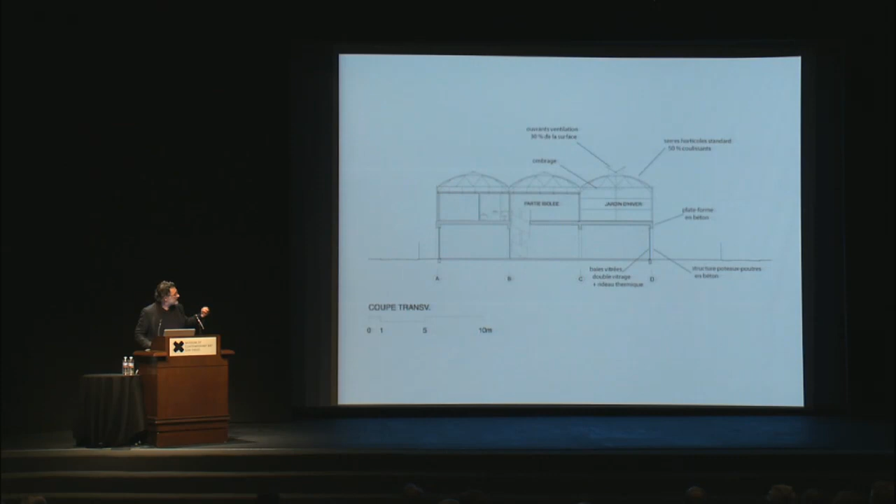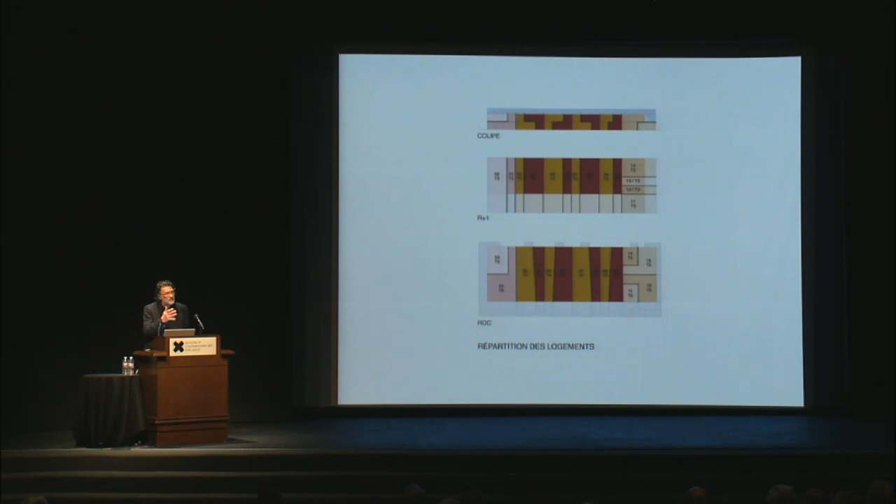To adapt these two systems creates a system in which it is then possible to create flats. Partition inside with flats on the ground floor and on the upper floor each time, so that each family and each flat could have the qualities of the different spaces.

So instead of a flat that would be type 3 or type 4, with 3 beds for example, and normally that is 70 or 80 square meters, there it was possible to build in the same cost, in the same budget, a flat that is 180 square meters.

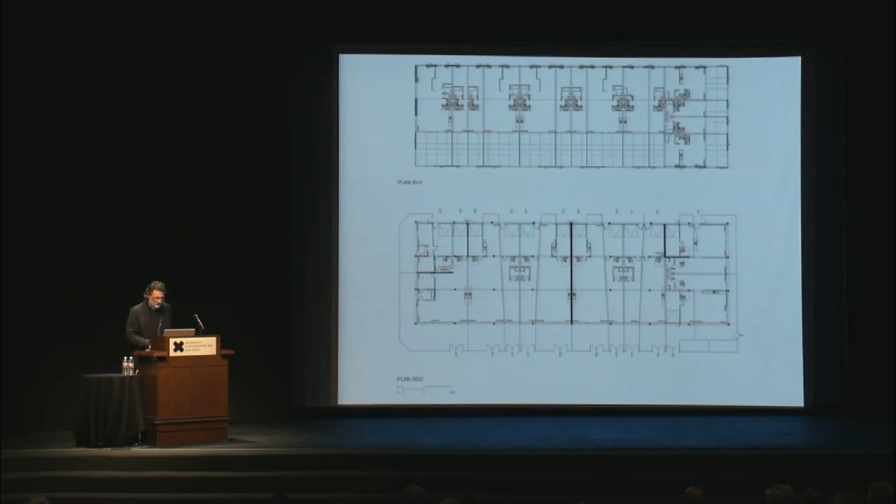Using always these systems of envelopes, greenhouse envelopes, in order to have natural ventilation, to use the sun in a passive way, and to create a climate that will also reduce the energy consumption. So it is this play, this game that we can have with the climate that really interests us in all these projects, using all this passive system in order to create good conditions of living.

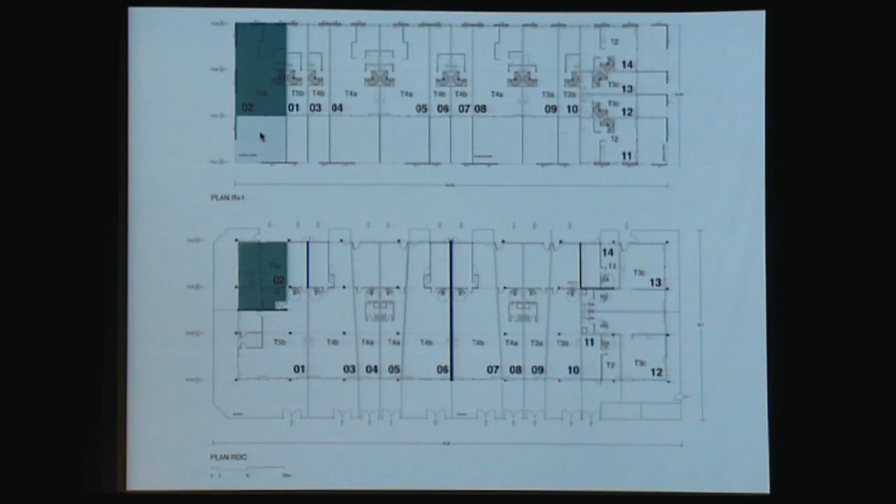Inside one flat, the winter garden. And another flat that is a type 4 with 4 rooms has a part here on the ground floor and another part here with 2 other rooms, a big living room opening to the winter garden. The winter garden is 40 square meters.

The bedroom on the ground floor, the living room, opening to the winter garden. Screens for the sun when there is too much sun, and possibilities of ventilation. So it is this free space that changes totally the ways of living, that gives more freedom for the people living in, and that really interests us when it stays in the same budget as a normal flat.

We can apply this for flats and for houses or for villas, but it's also possible to think about it for public buildings, like this one that is the School of Architecture in the city of Nantes, close to the river Loire, where the same problem happens.

How is it possible to do with a budget, with a program extremely adapted to this budget, to imagine that a school of architecture can be something else than just a school of architecture? I mean a school of architecture that could be a place of debate, a place of discussion, a place of invitation, a place where, as if you had a very large living room, you could invite another school to come and discuss with you.

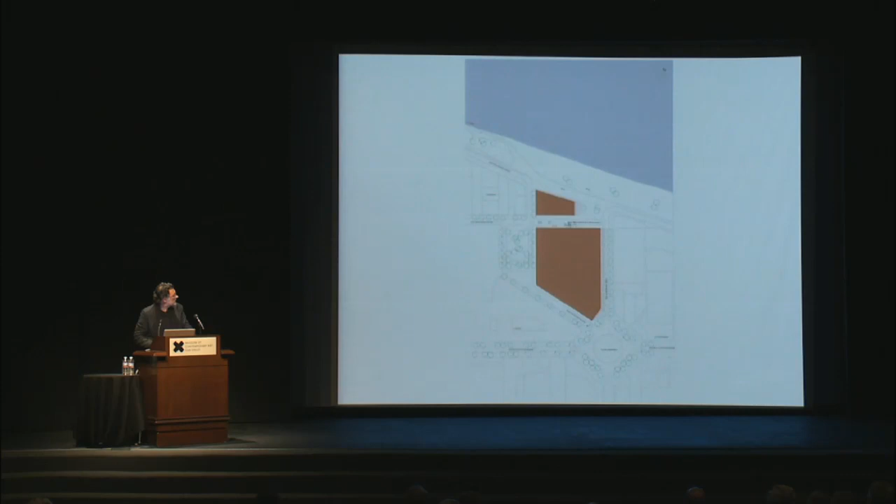We use these two parts of the parcel with a street that crosses the space, and we imagine a system. It's no more an architecture that is an object, but an architecture that is a system working with the climate outside, with the city outside.

So we have 3 main floors, at 9 meters high from the ground floor, 7 meters higher, and another one 7 meters higher. Each of these floors has a capacity of 1 ton per square meter. And from the ground floor, a ramp of 8 meters wide goes from level 0 to level 1, to level 2, and level 2 to the roof.

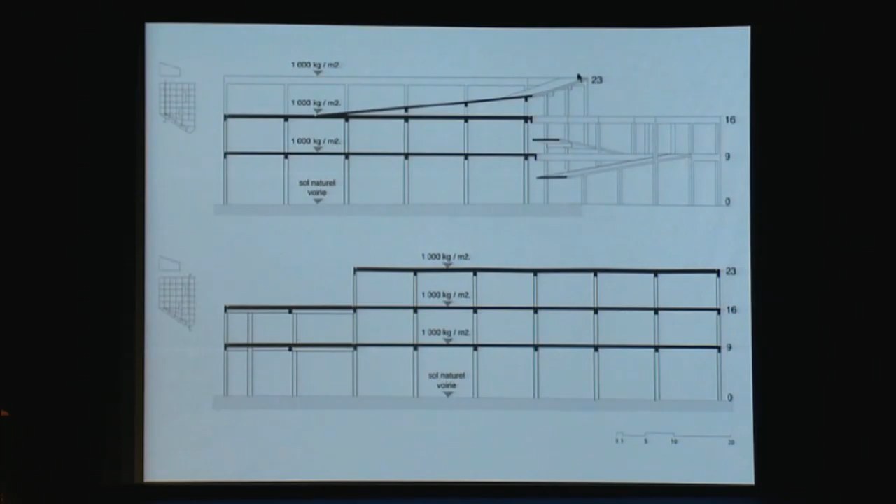And the roof is also a 3,000 square meter area with 1 ton per square meter of capacity, in order to propose some possibilities and some freedom for the school. So it's a very efficient system of construction with prefabricated elements: only a frame, columns, beams, and floors.

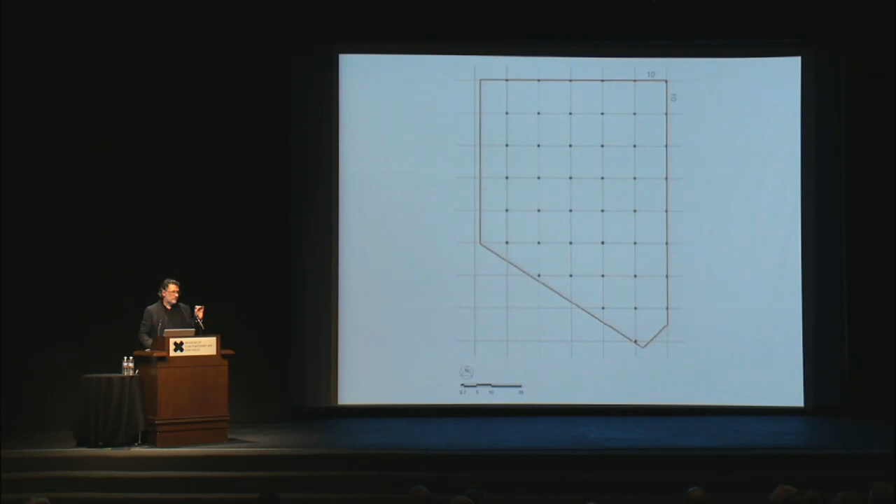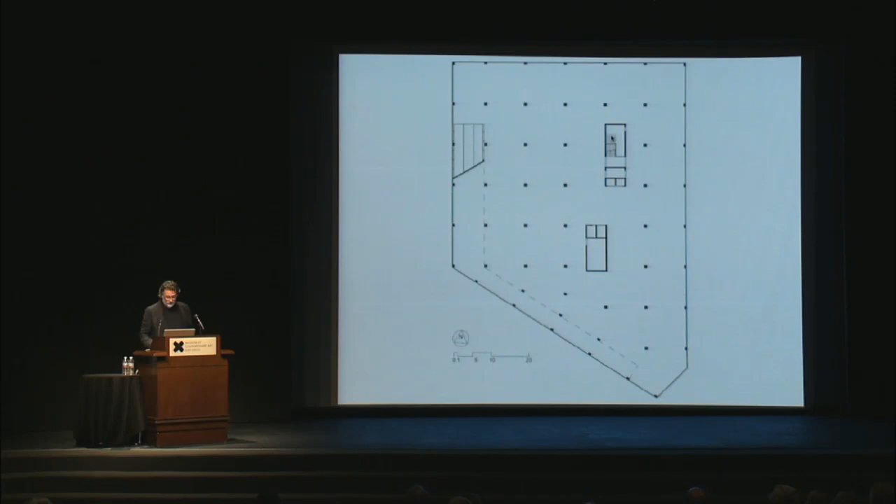The starting point of the ramp, and the elevators and stairs, and then the construction of the school, like a very large system open to a maximum of possibilities. You see here the ramp going from here, and then here, climbing here, and then reaching the roof here. So this was the building.

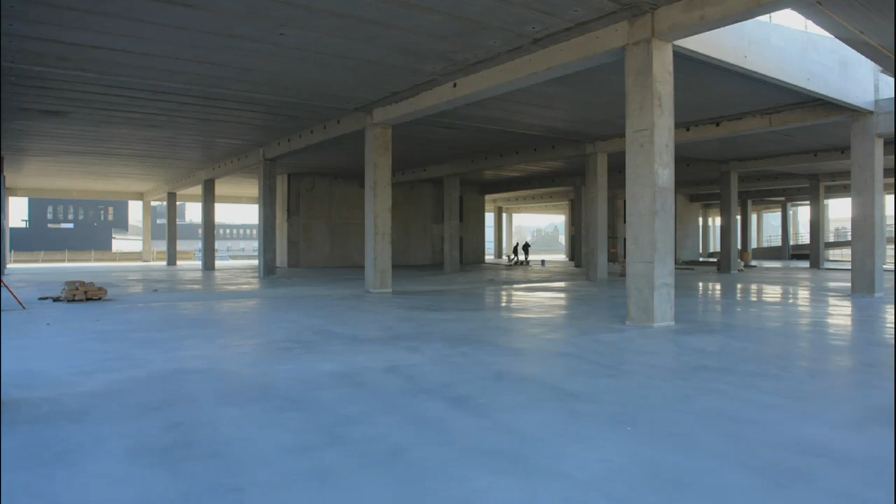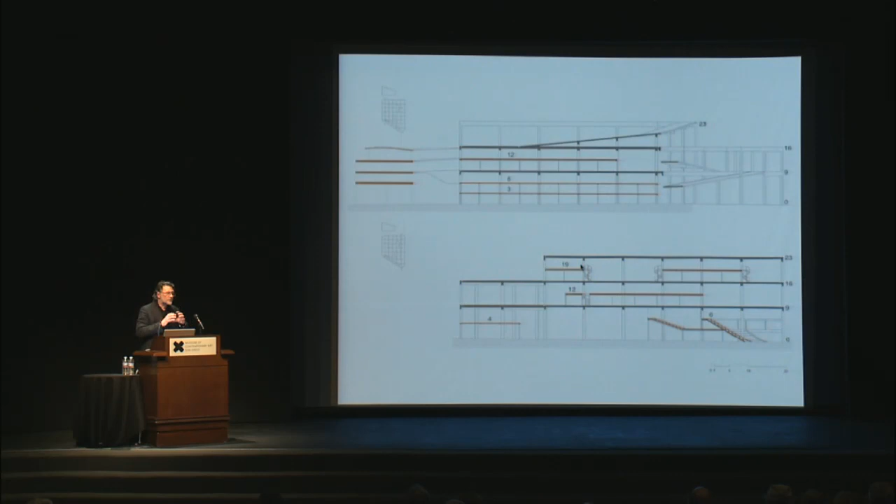Like a loft that we leave to the school, a very large space open to construction inside. And then, inside this system, it was possible for the school to go in, to install itself with new floors, lighter floors made by a steel system, these red ones, because we can use the height of 7 meters on each floor. And all these floors can support directly on the main principal floors.

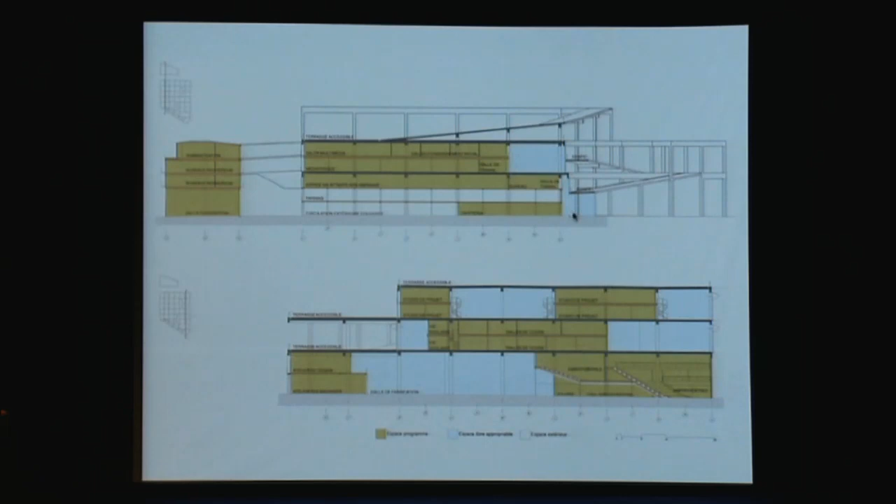Inside the system, it was possible to define 2 kinds of climate. The green color shows the programmatic climate, the one that is heated to 20 degrees, where it is totally insulated, etc. And the blue one that you can see here is a sort of intermediate, bioclimatic climate. So it takes the sun by passive radiation, and also creates a sort of intermediate climate between the outside climate of the city of Nantes and the inside one.

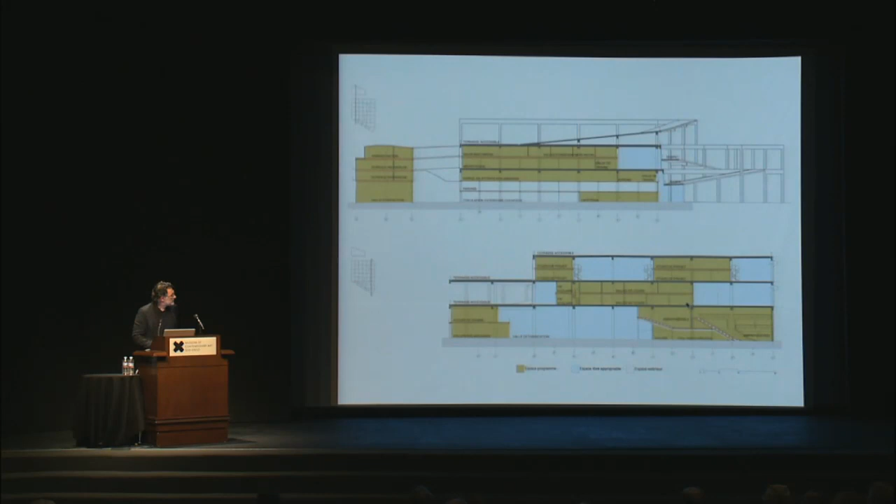And all of this creates a system where you have this combination of possibilities, to use the climate differently. And this offers, at the end, a capacity of 20,000 square meters of use instead of the program of 10,000. And you have nearly 30,000 square meters, including outside space.

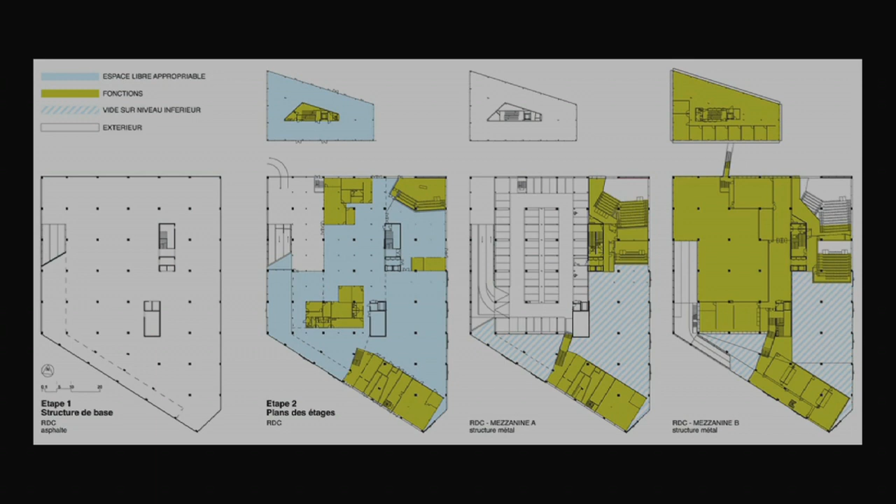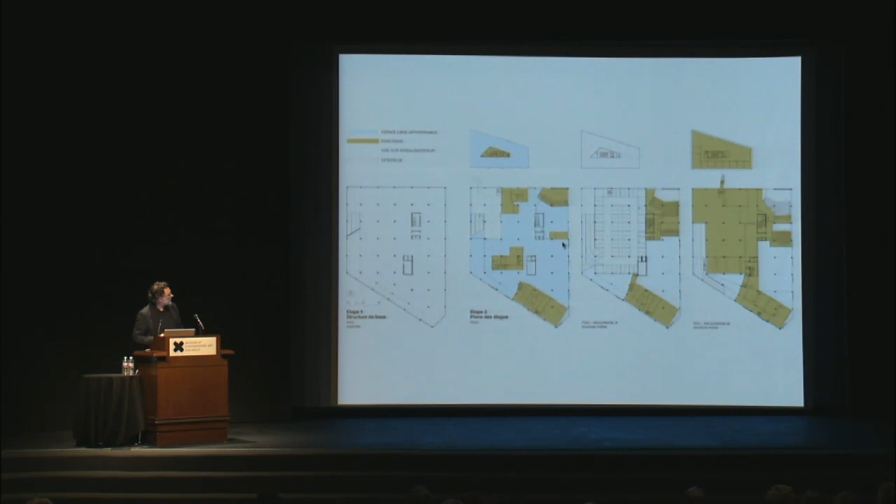So really playing with the budget, with respect for the original budget, giving the capacity of double space and double area. So the ground floor with the 2 intermediate floors, with the car park here, that is not on the ground floor and not underground, in order to be economic, and different spaces for atelier and auditorium, administration, research.

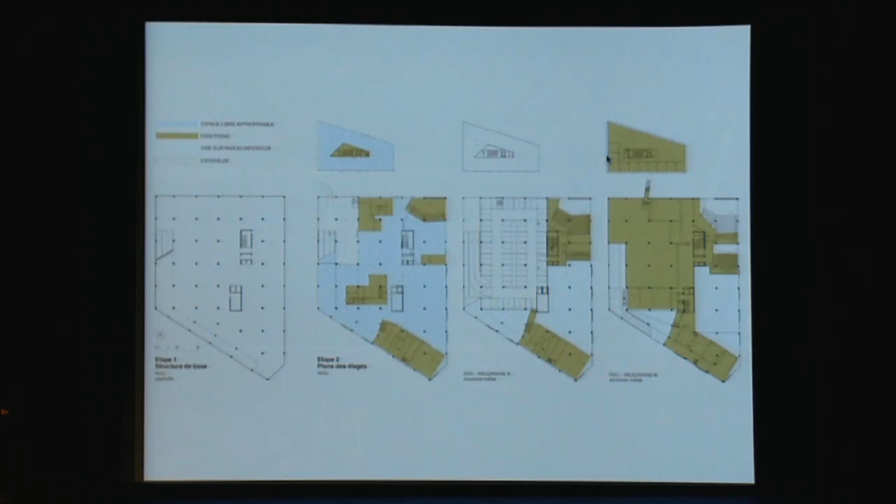The level 1, at 9 meters high, where you always have the structural system and the mezzanine, the intermediate level.

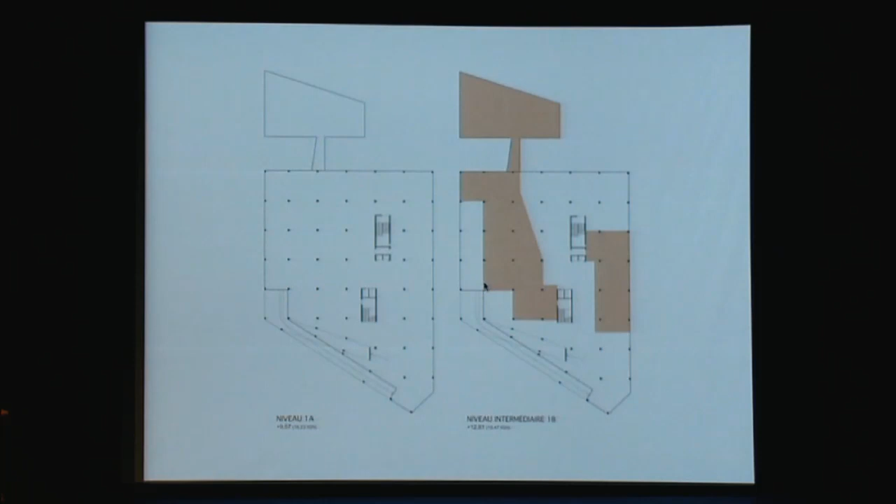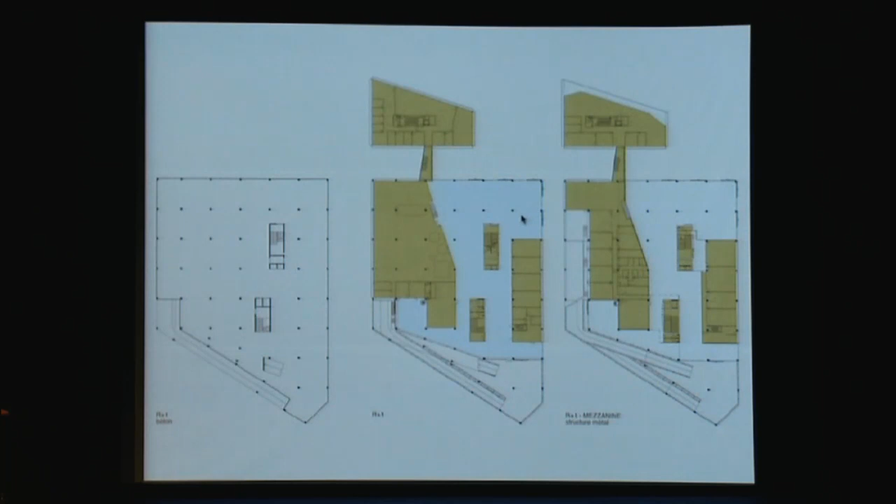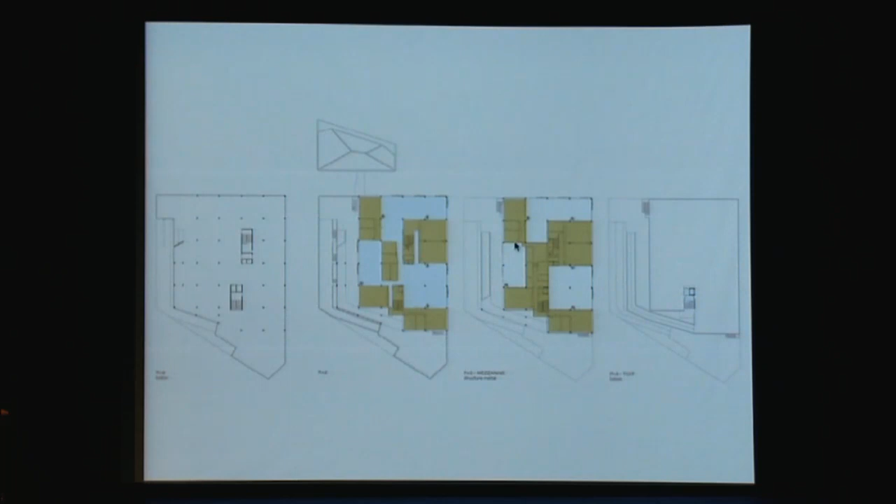And the way we have two different climates, a programmatic climate and a bioclimatic one. Level 2, where we find the studios of architecture with the same system of different climates, and the roof, which is this big space area for different possibilities of use.

Then we see the building of the intermediate floors, and then the project closes with different facades, sliding, open to the outside. The cafeteria, the auditorium that can open its screens to the landscape behind, which is the river of Nantes.

So this question of a very strong relation all the time between inside and outside. When I define architecture as a system, it is something playing with the outside. It's not an object finished by an envelope, but a system always open by sliding doors from outside to inside.

And a system that makes all events possible, using the building to look at what happens in the streets, the different events, the starting of the ramp and the parking and the classrooms there. This free space where you can have discussions.

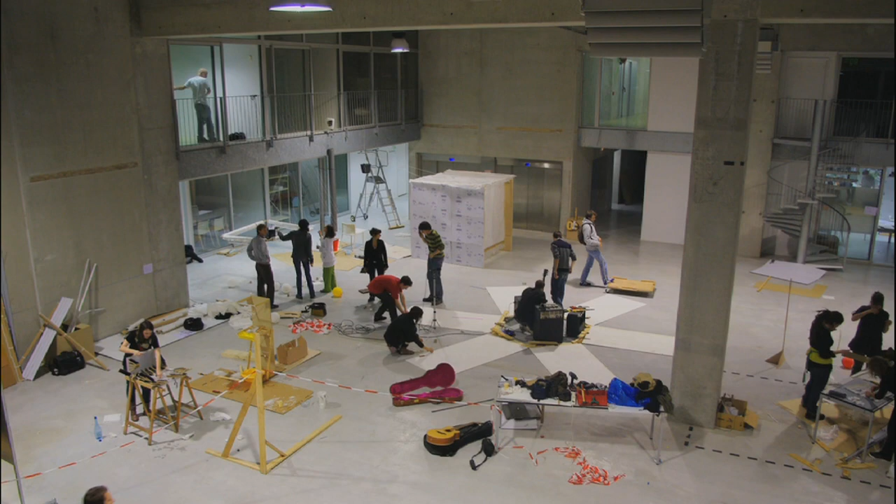Using the space for models, possibility to bring some elements with lorries as storage, to bring them on the ramp, to follow the ramp to the last floor, to use it also as a free space, open to the city, open to the public, open to the cyclists.

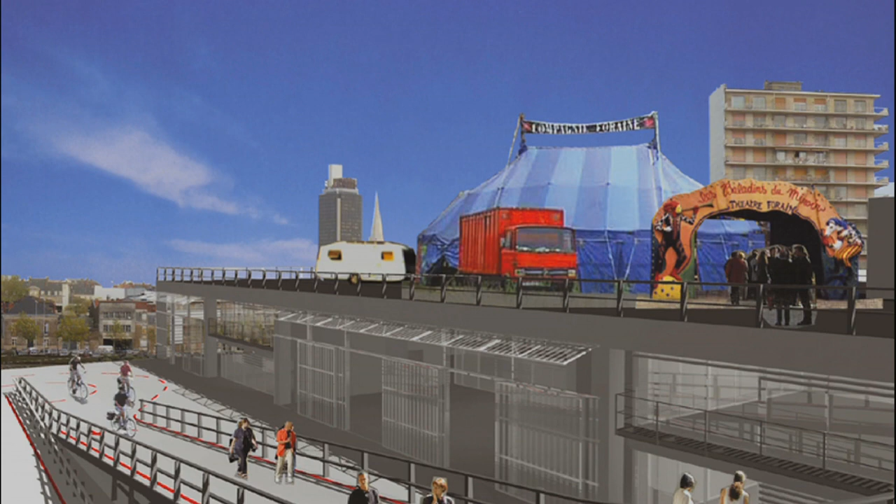And then this image, which is still not done, but the possibility to have on the top roof also a circus and a panorama over the whole city.

So here also this economy, this question of what is the minimum of material I have to use in order to create the maximum of volume, the maximum of capacity, the maximum of use possible for the inhabitants of this school, is the main question.

Another very small project talking about urban space. It's a place in the city of Bordeaux, outside the center, a very modest situation, where the municipality wanted to embellish the plaza. And after a lot of research, discussion, interviews with the inhabitants, we finished by...

convincing the clients, the Mairie of Bordeaux, that the best project was to do nothing. No reason to change the ground, no reason to change the benches, no reason to change the lights, because there was a sort of charm here, everything was enough, and there was absolutely no necessity to change the things that were quite okay like they were.

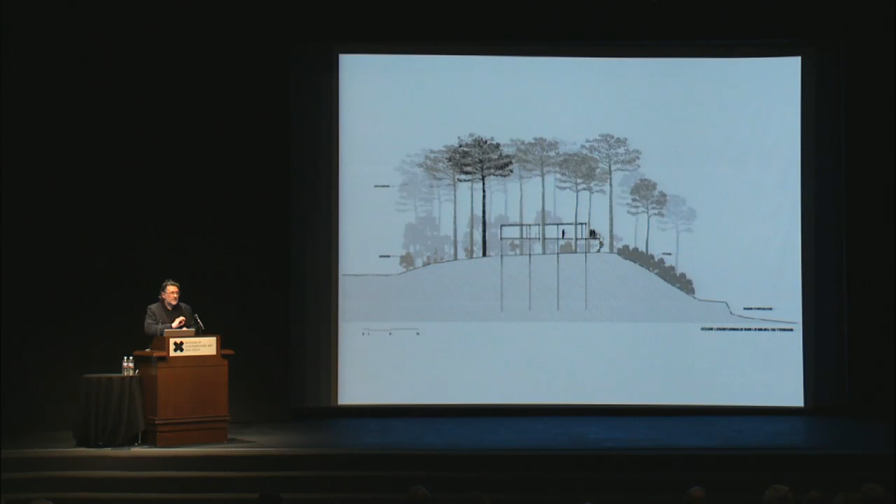With micro foundations in order to be extremely precise and to avoid damage, and also to take care with the roots of the trees. The challenge was to keep all the trees, absolutely all the trees. So you find the trees inside the house or just outside.

Here in the corridor between bedroom and toilets, for example. And to use all that exists.

Also the idea that we could go under this house and it could be dark, but in fact the reflection of the sun on the sea makes the sun come from down to up, rising on the aluminum elements so that the place is lightened.

And play—it's always a question of game and play. It's really interesting and nice and exciting to work like this. Find the way how technically to leave the trunks moving with the wind inside the house.

And then to have the feeling that as you live there, you are part of the forest. Your house is just a platform of concrete with some steel columns, and this is the minimum to take the maximum advantage of the situation. So always minimum for maximum.

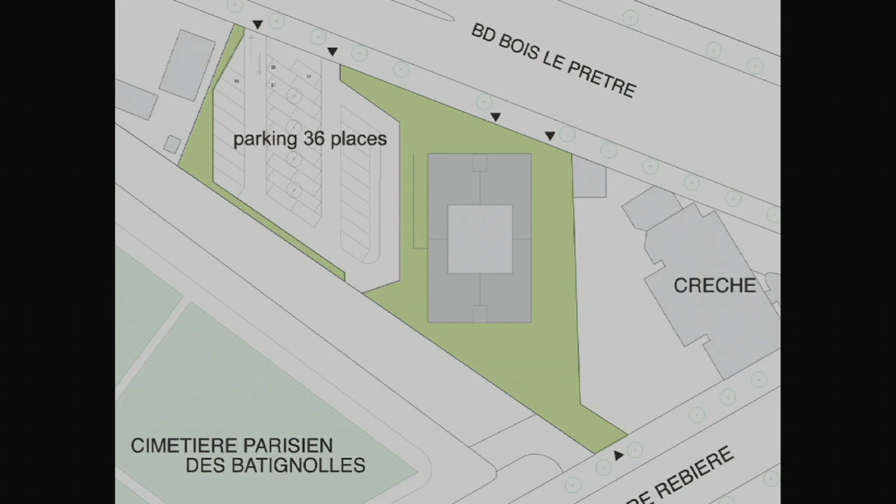And you have also beautiful views, but behind very, very small windows. So there is time for discussion, to explain, to make the project. Here it was with a very good friend, Frédéric Druot. We were associated on this project, to see the possibility to extend the building.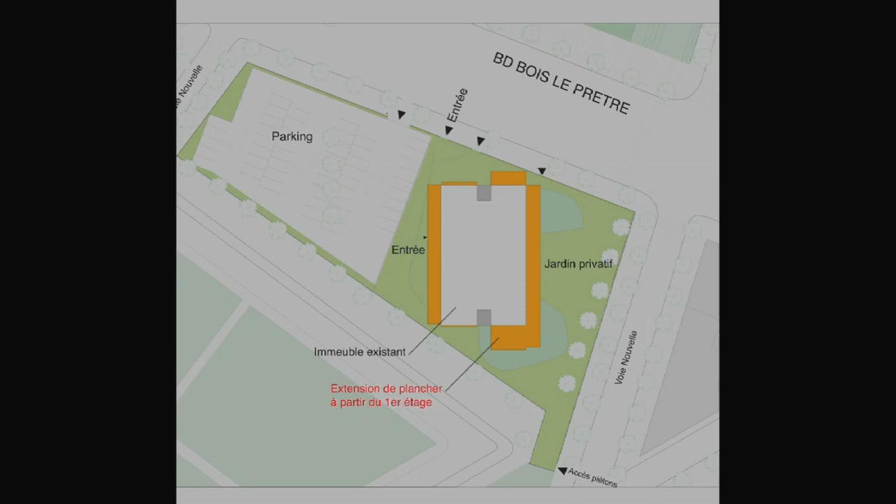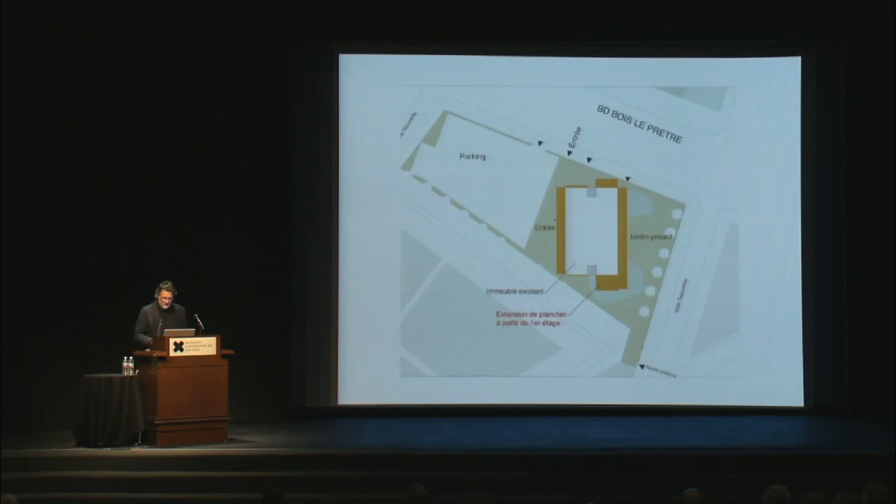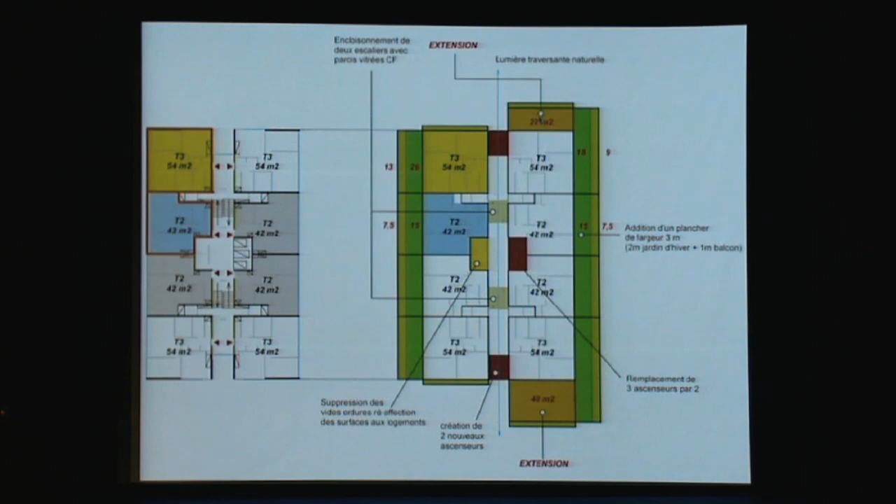So the orange part is the extension of the building, in order to modify and resolve some thermal problems, some energy savings questions. For example, here it is the situation today with the type 3 and type 2, and here is the project with the extensions—winter gardens and balconies. And we see here how one type 3 takes one bedroom more, plus a winter garden and balcony.

All the families are living in this building, and it was clear that they should stay during the works. So we have two more elevators in order to create better accessibility to different people.

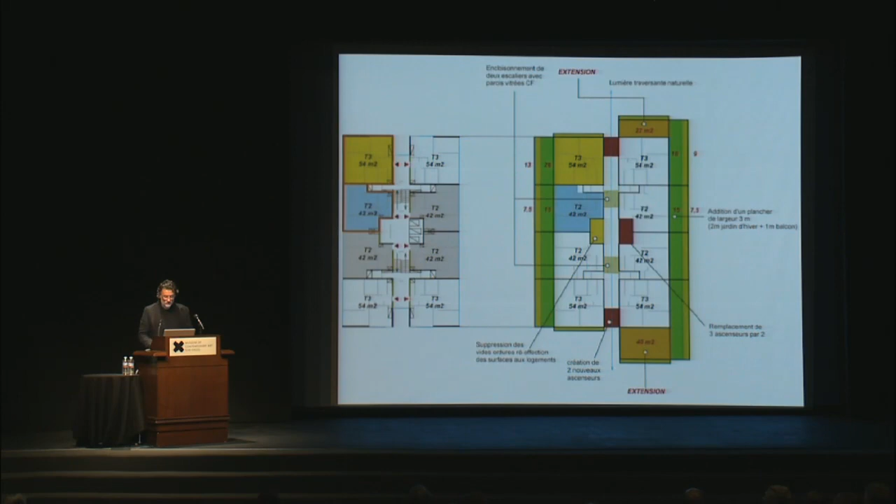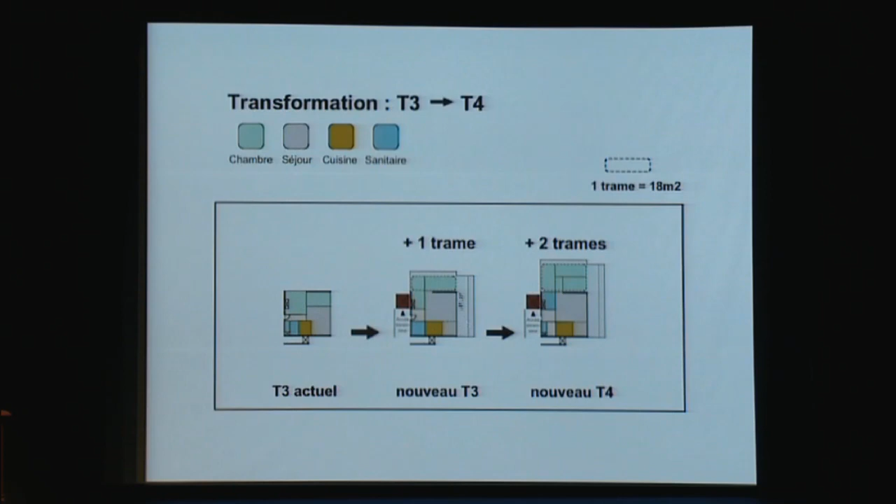We see here how one flat is transformed: a new elevator, a new heated space for a bedroom and a new kitchen, and a larger living room, and then the winter garden and the balcony that could transform into a type 3 or a type 4.

This is all the movements of the people. People wanting to live upstairs, or people that were upstairs preferred to live downstairs. There were 2 people in a type 6 who wanted a type 3. There were 6 people in a type 2 who wanted a larger one. A family of 19 people in a type 6, so we had to find 3 apartments.

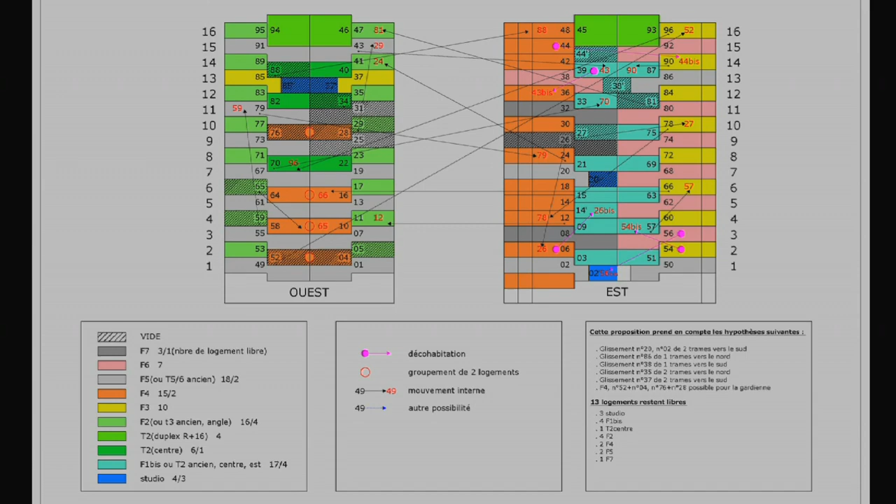All these movements of people were discussed and proposed, and with this precision, everybody agreed to do the project.

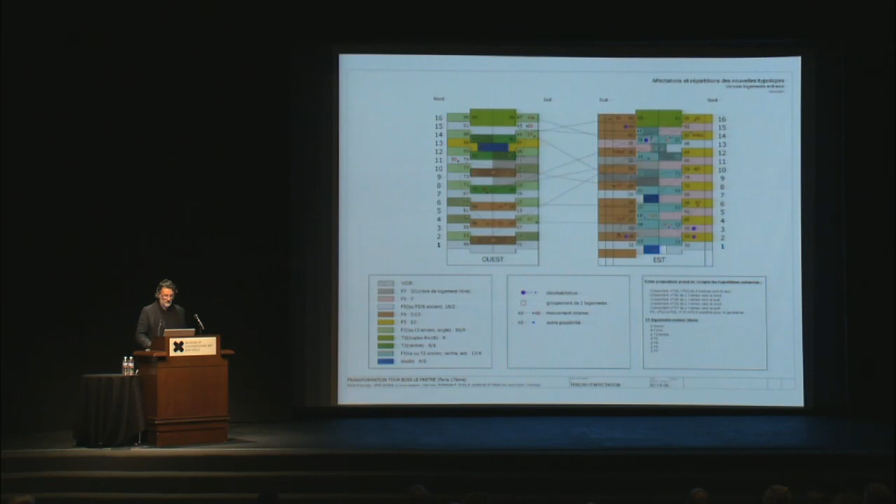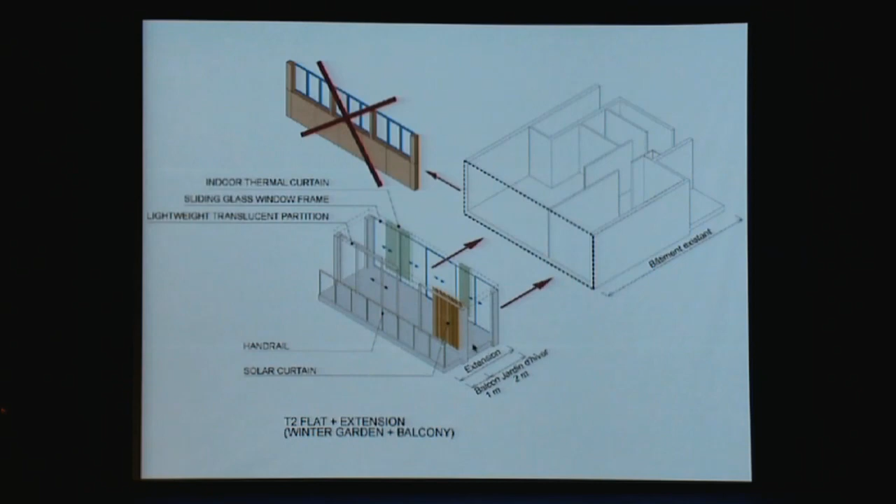The question was to change this facade and add a new one, with large sliding doors from floor to ceiling, open to a balcony with a winter garden, like this.

The new construction has its own foundations. It just comes close to the old facade. And then the building is transformed with the extensions.

This gives a better situation for the rays of the sun. In summer, there is protection by the main facade, so you are in the shadow. In winter, the rays of the sun can go quite far, so you use the passive solar effect.

At night you have a very thick curtain with insulation that allows you to keep the warmth in. With these elements, it was possible to achieve an energy saving of 60%.

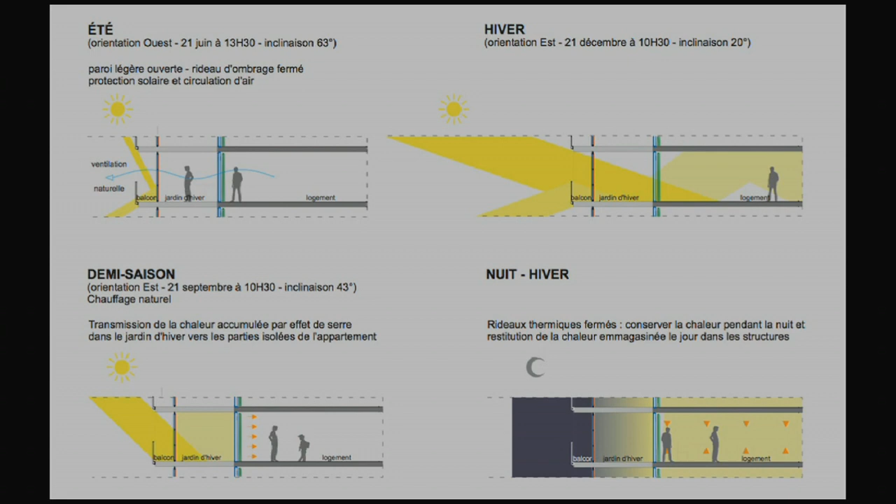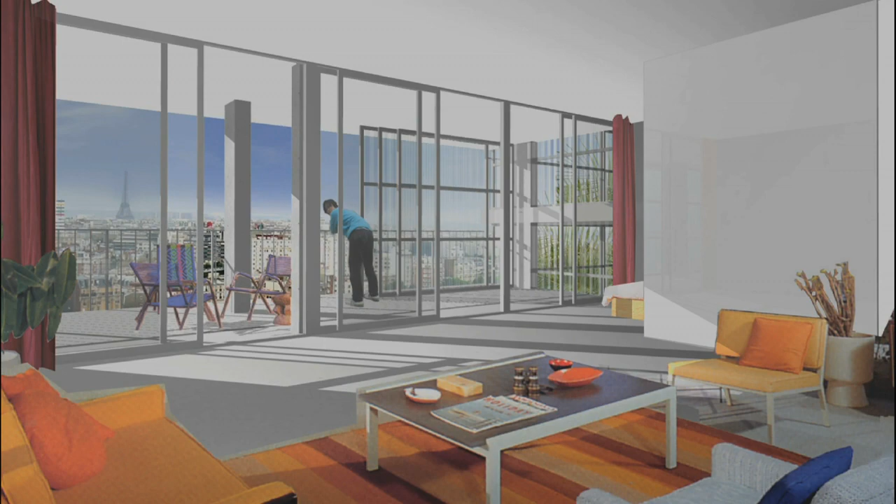So like it is, and like it was transformed in the image, with this winter garden. This here is the place of the old facade, changed by the new one: 2 meters of winter garden plus 1 meter of balcony.

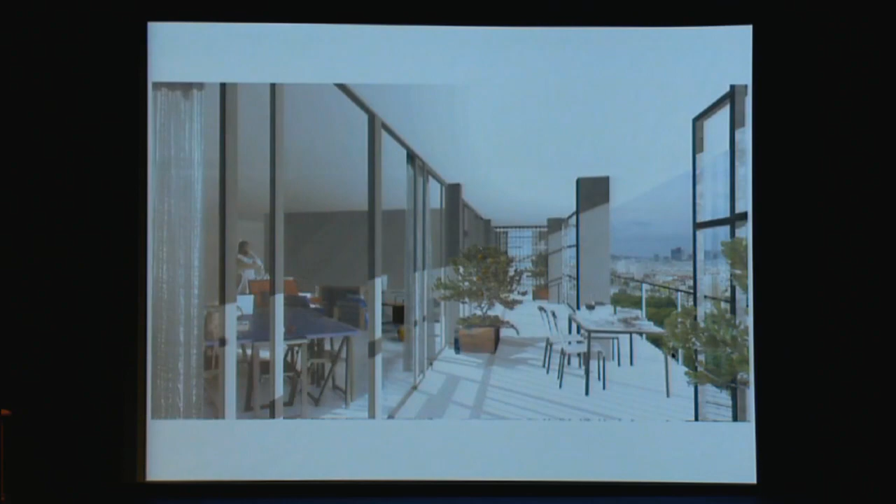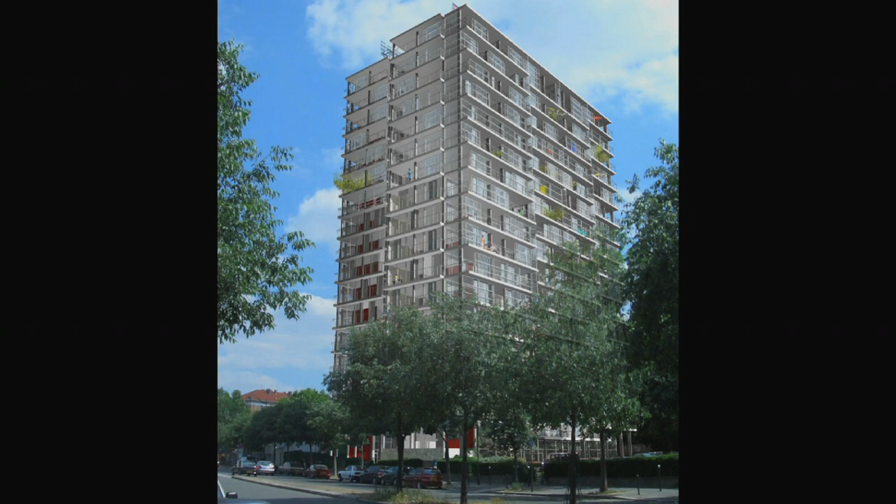This change from inside will automatically change the building's look from outside. It's never really a question of facade, it's a question of life inside, and when you look at it from outside, it's perfect.

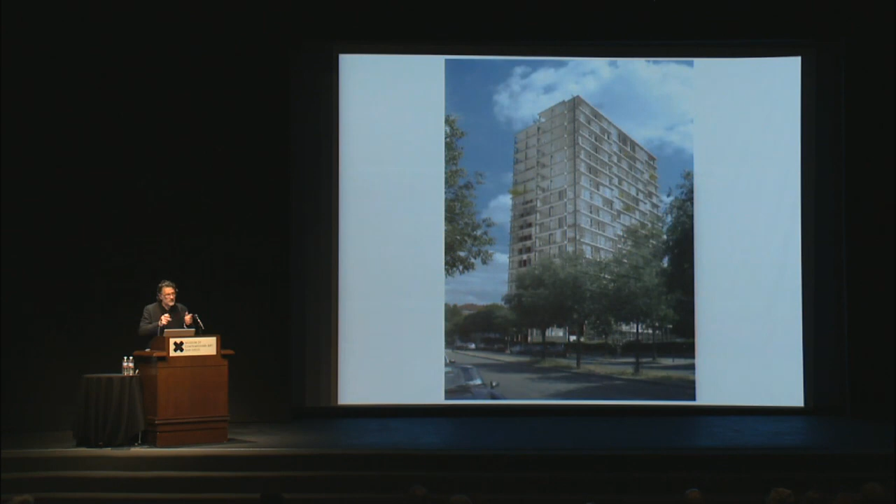It is not a question of developing an object. It is just a question of giving good living conditions for everybody.

This was the first prototype, and this was the situation before it changed. Then the works start: foundations, changing the facade, taking away the asbestos. All the time the people and the families were inside.

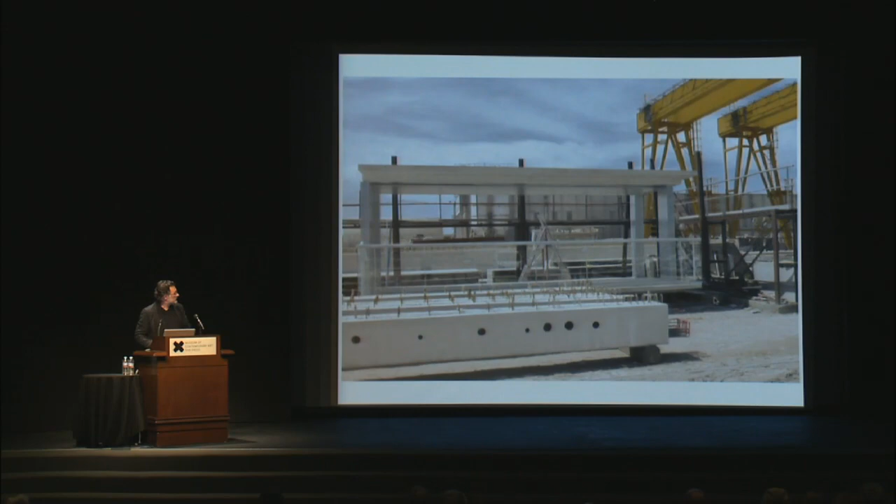Making the new elements like modular systems, each of them 25 square meters, and then placing them along the facade.

Now the work is nearly finished. It will be finished in 3 or 4 months. The people and families are really happy with their new extensions.

At the end, it's a project that is much more economical than demolishing and rebuilding. So the economy is better. Also interesting, instead of having a new standard after demolition, we have here a building in which the areas and surfaces of the apartments are much bigger than the standard. So here too, the economy leads to this kind of solution.

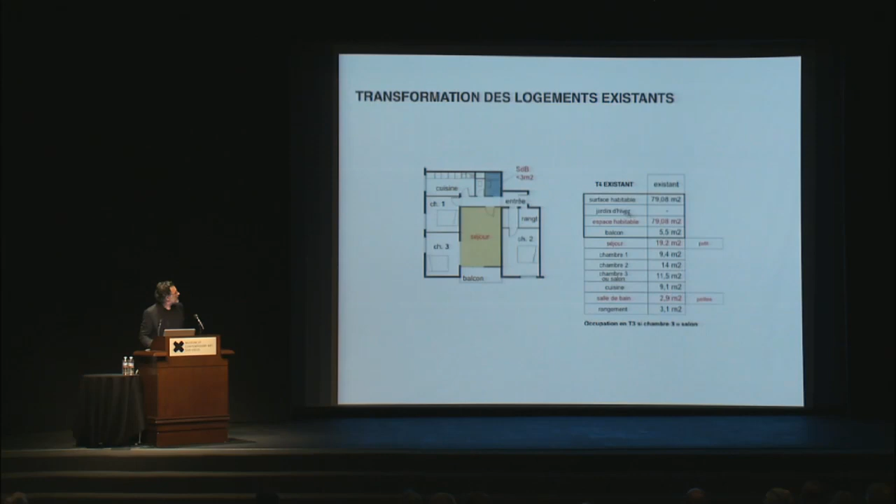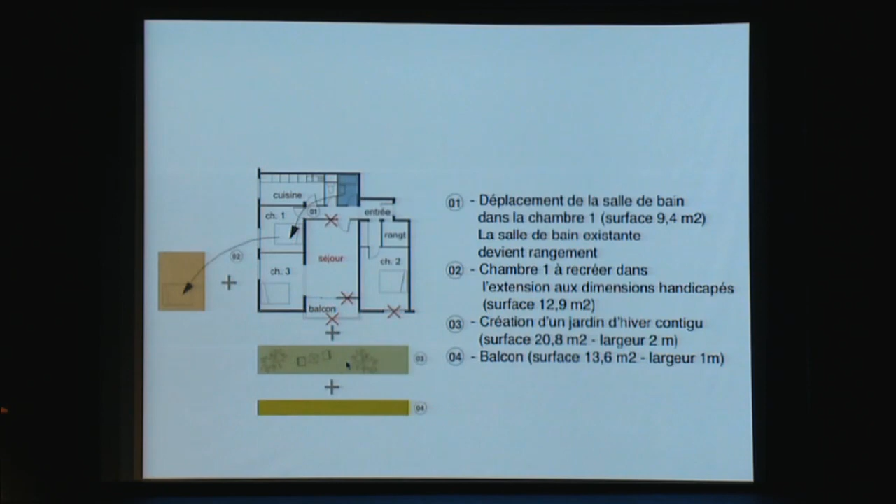A similar kind of project started in another city, Saint-Nazaire, where the little bathroom of 2 or 3 square meters is changed and placed instead of a bedroom. The new bedroom is created outside. The balcony is changed into a winter garden and balcony, so you have a new apartment.

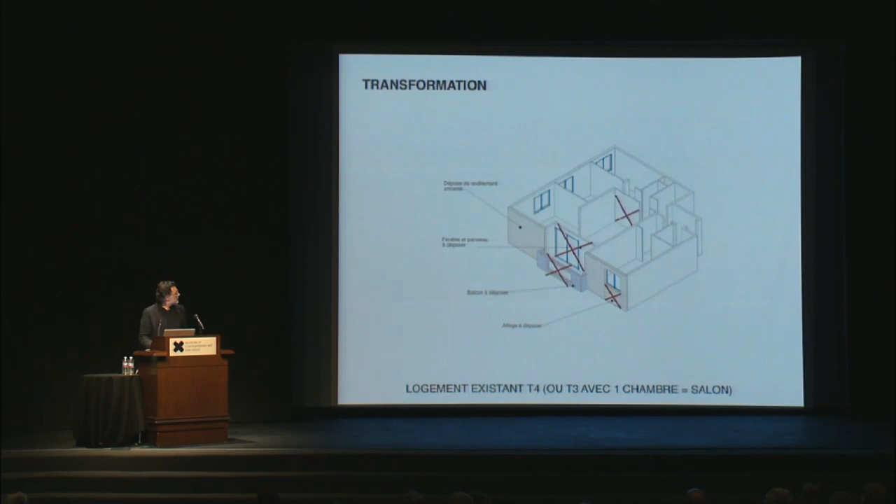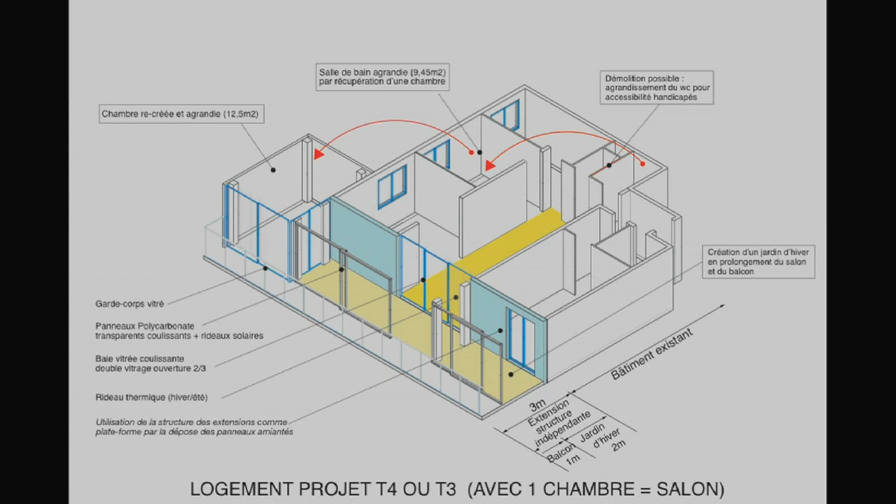It is always this very precise system, creating this relation between inside and outside that I feel is so important in buildings. Not to be behind a sort of machine envelope that works mechanically, but something that works with the climate each day in a different way.

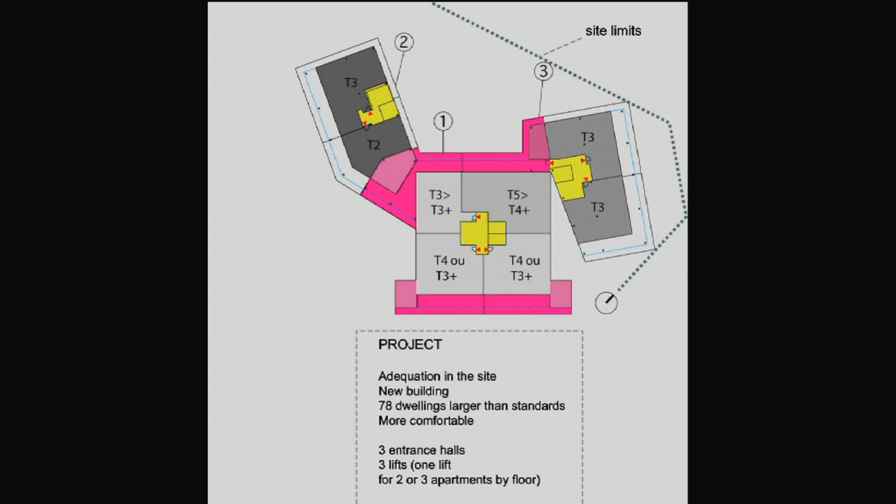This was the situation before: 4 apartments on 10 levels. Then the possibility to add some winter gardens and extensions to the buildings, but also to create densification in the area, adding 20 and 20 more flats to the same project.

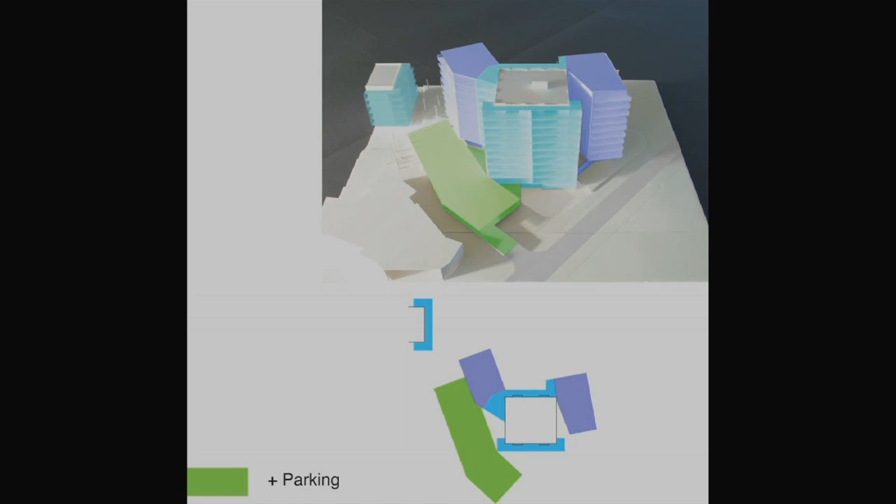So the transformation: winter gardens, additions, new flats, new car park covered by a green roof, better accessibility for disabled people, and the transformation works.

So all these projects, they are really based on this question of, with this low budget, how is it possible to create better comfort, better possibilities.

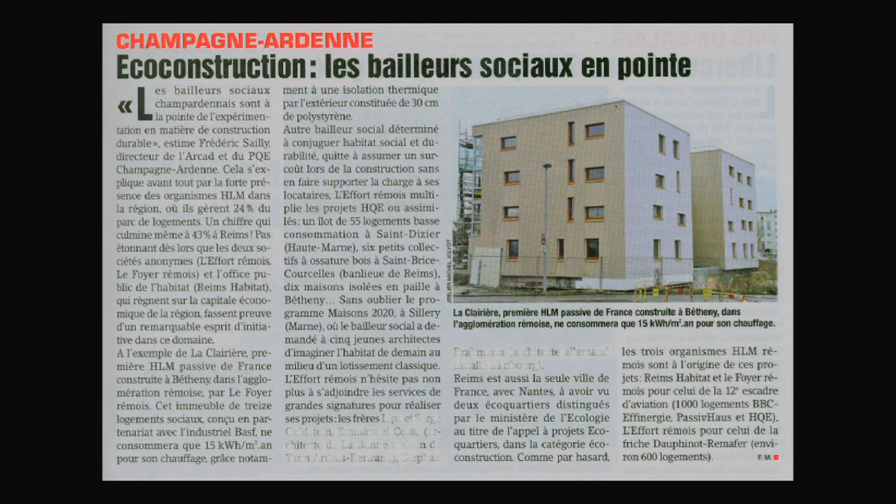Perhaps the last project I'll show you. It's a competition, what we call in France eco-quartier, a sort of ecological area for new developments. Most of the time, to make an ecological area means creating more insulation, more closed facades, and we really fight against this situation.

So it's a very strange challenge to think about eco-quartier here, where in this city we had a very beautiful old forest that disappeared over time because the city kept taking its place. So perhaps it's a mistake to say an eco-quartier has to be here, because it would probably be better to imagine an eco-quartier on a car park or on a supermarket.

But here the question was to use these systems for nearly 400 flats. That was a real change, and for us it was really sad, because we imagined that this forest could disappear a little more.

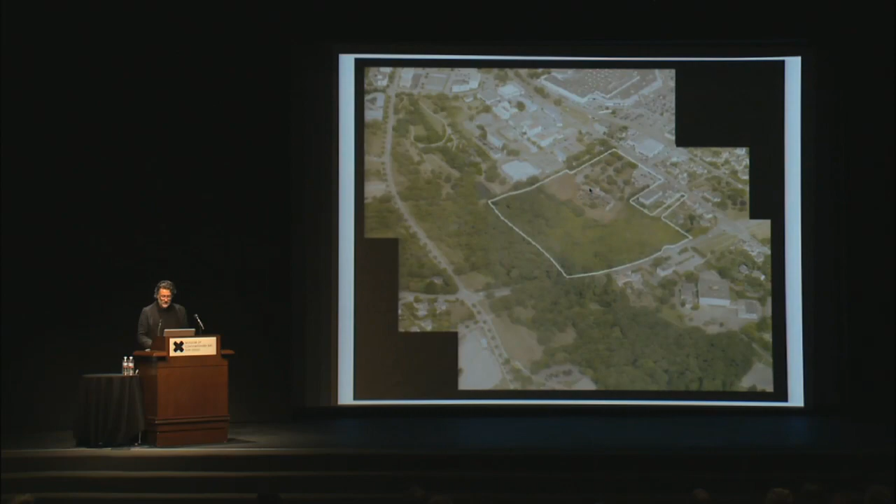On this project, there was a whole building promised for demolition. We tried to inform the municipality in order to keep it, but they said it was too late. We tried a lot to change their decision, but it was not possible. They always decided it was better to demolish and rebuild from tabula rasa.

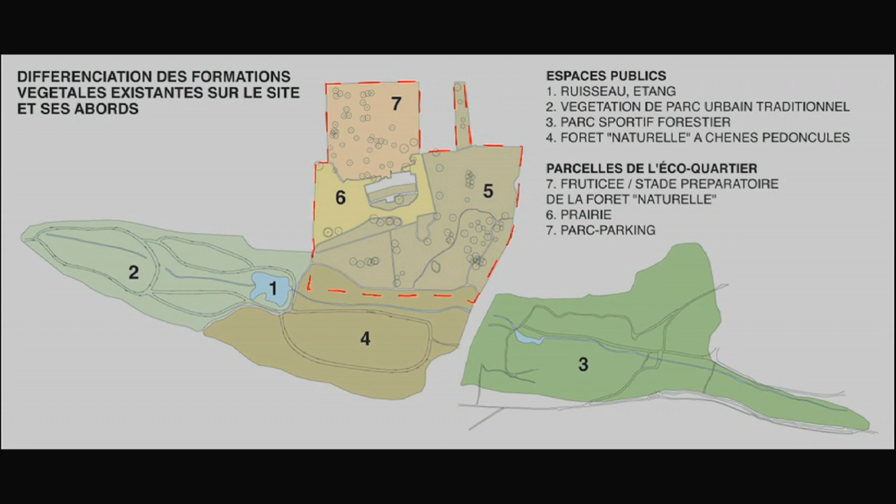We started to analyze and think about this forest, all the different areas and parts where the forest was before it disappeared because of the project, the different atmospheres and ambiances of the forest going deeper, and then coming to the really native forest in the back, with birds and animals living there.

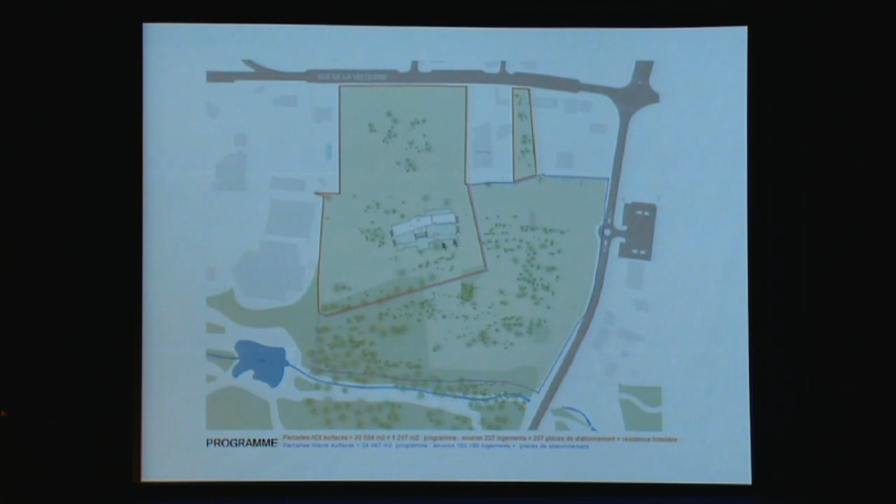So the question for us was normally to keep the existing building, because there was absolutely no reason to take it away, and to think that the main thing was to defend and protect the ground and the soil, so that we could have the least impact possible on it.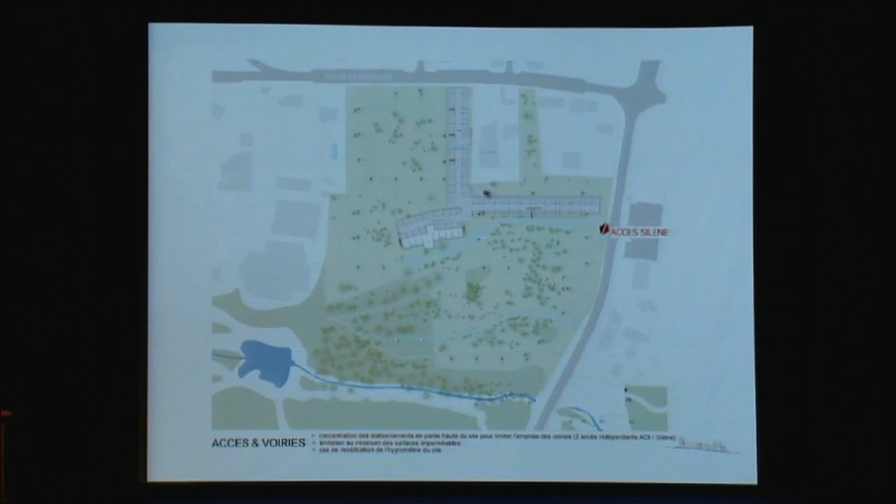So the car park was totally close to the streets and close to the city, linked with the existing car park of this old building. And we said these would be the only roads, no more roads than these.

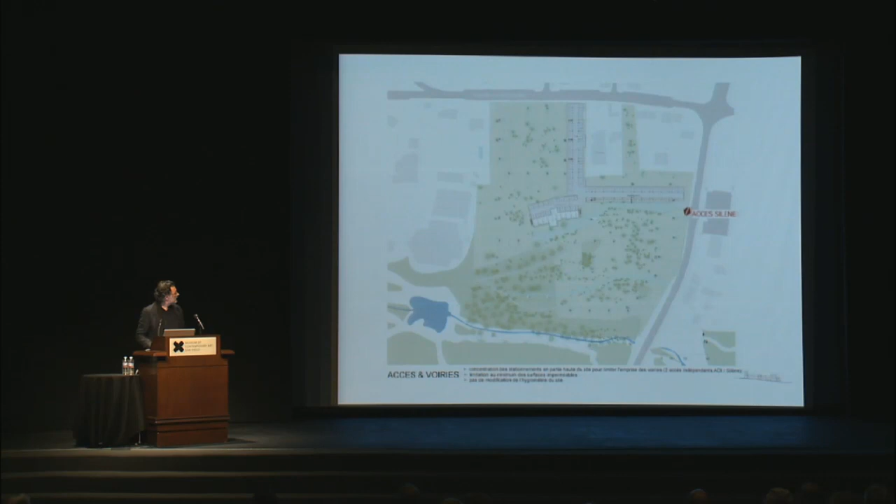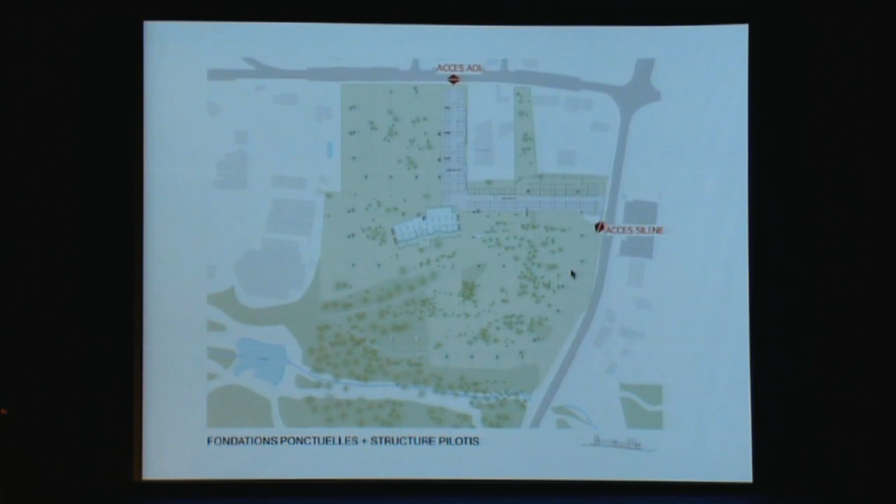Then there were some little pathways in the forest, and some points you can nearly not see here, sometimes some stairs, some columns, and sometimes some elevators. So you see the different systems.

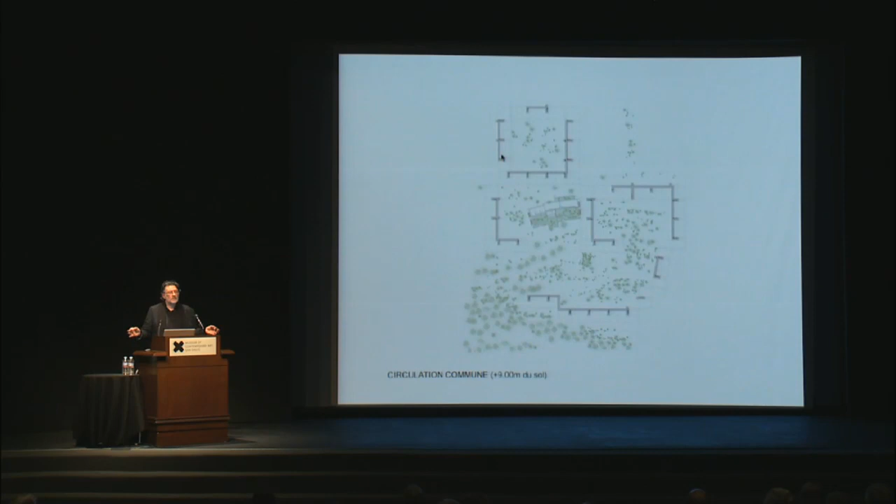The buildings were built on very long columns, long legs. The first passage was 9 meters high from the ground floor. It was this sort of corridor linking the stairways, the staircases, and the elevators.

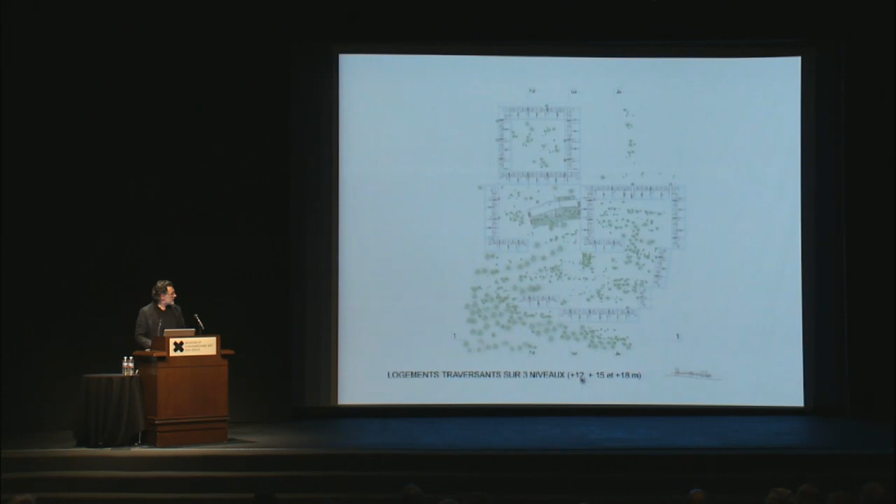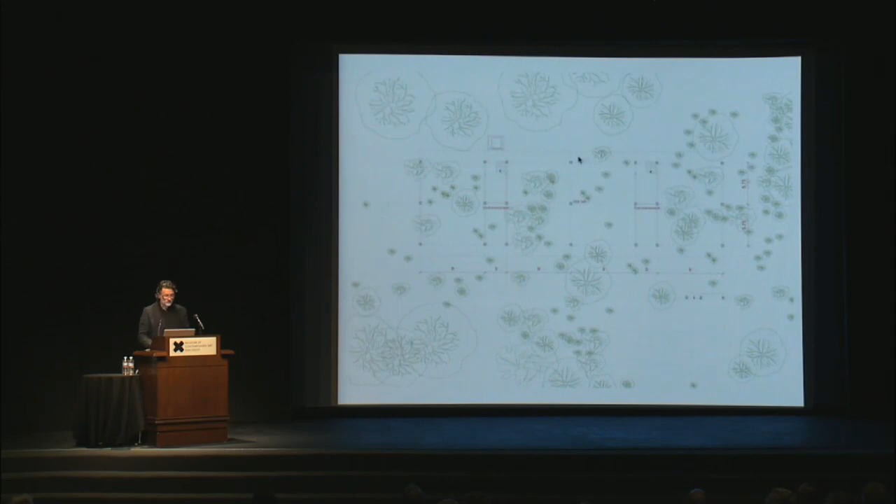Just above, the flats at 12 meters over the ground floor, on 3 levels at 12, 15, and 18 meters, and then some elements going a bit more up above. Very simple system of construction, very light.

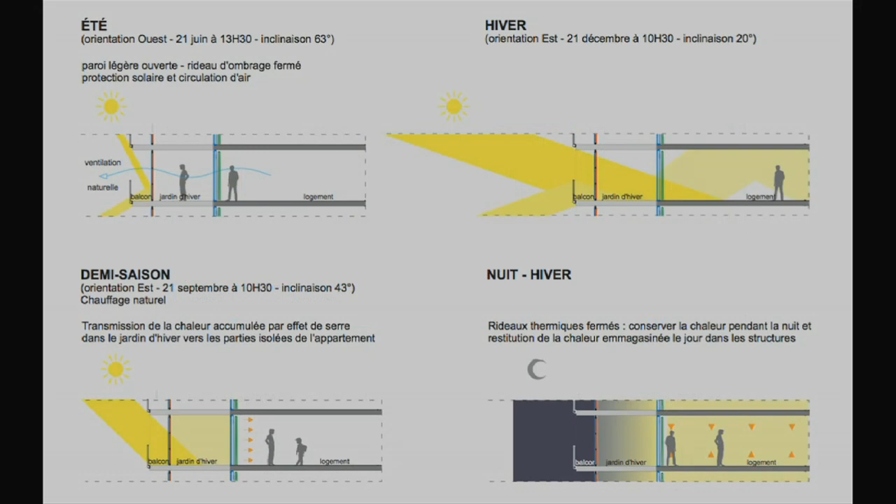Here the passageway, the systems are a very efficient system of columns and prefabricated elements. Then the flats, always with the systems of balcony and terrace sections.

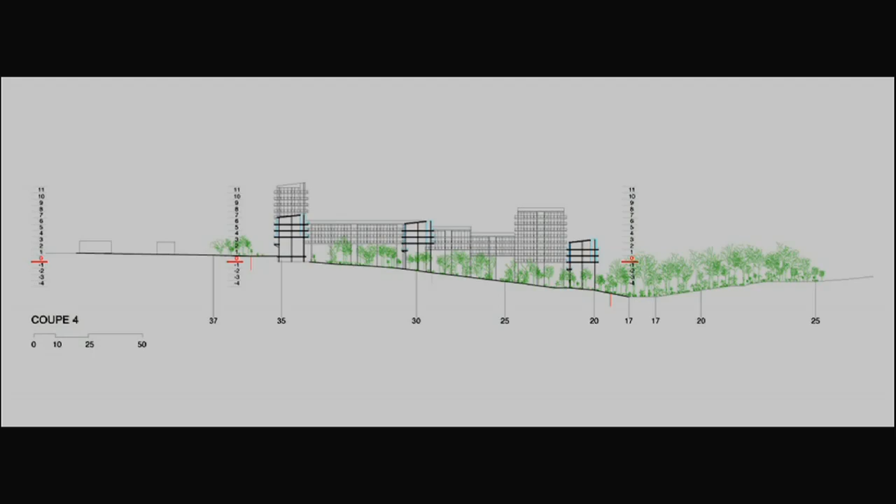And then this building rises from the ground, leaving the soil and the ground floor as it is to the maximum, as if we could keep the forest exactly like it is. And we imagine the possibility of development of this forest.

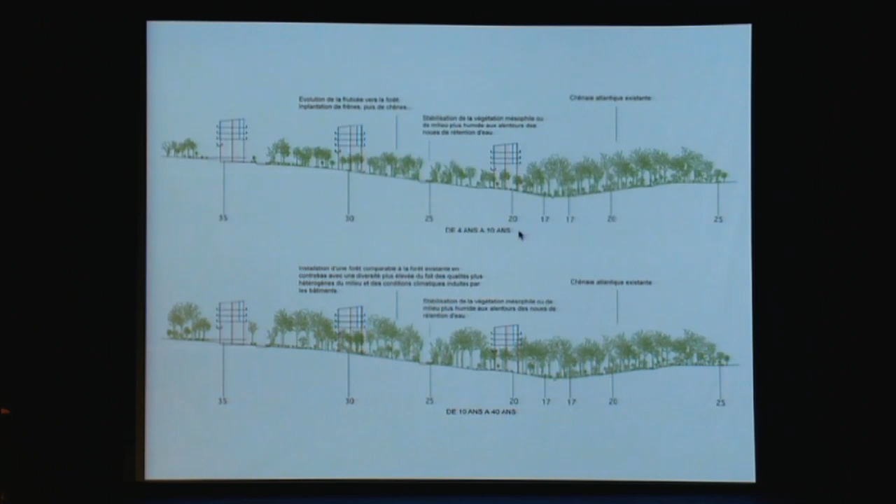This was the first year, between 1 and 4 years, between 4 and 10 years, and between 10 and 40 years. The idea was that people could live in situations with an ecological concern for themselves and how they could be responsible for the forest coming back to the city where it was disappearing before.

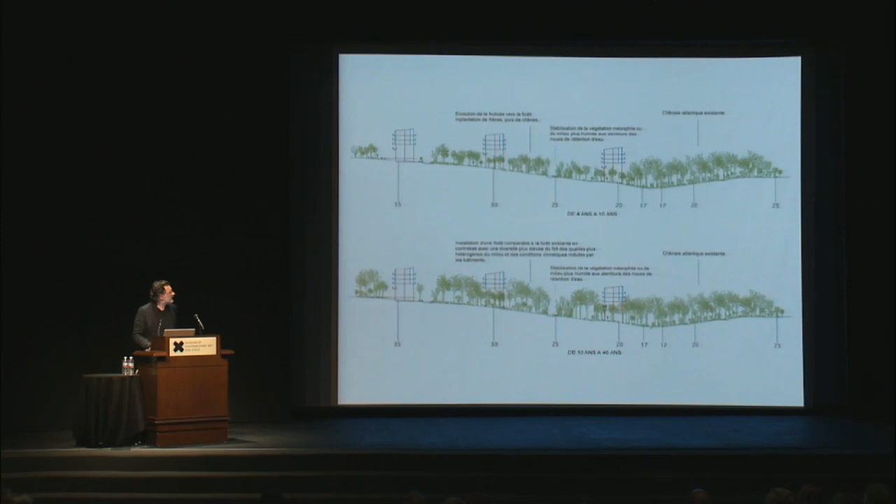Or it was possible to make the forest come back inside the cities to create new systems of atmosphere. So it's this interaction between natural elements and artificial elements, this interaction between nature and human that we are really interested to develop.

And then to be on the upper floor with this kind of view on the landscape.